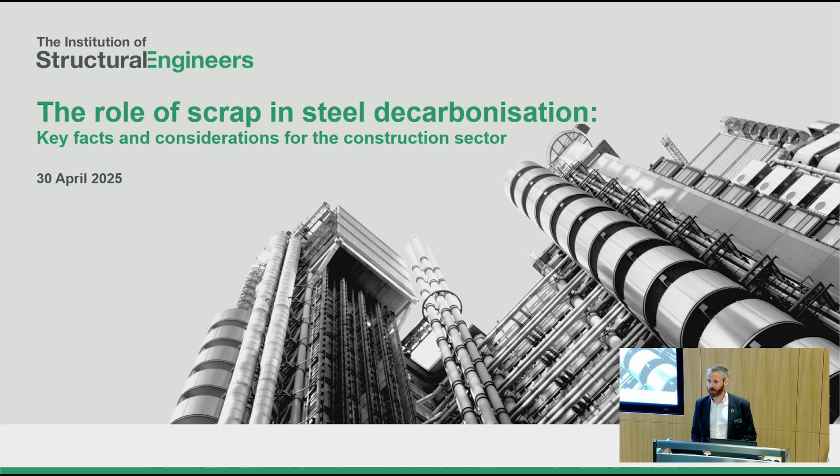So we're here to talk about scrap in steel decarbonisation, the role of it, what are the facts for the construction sector, and what do we need to consider when it comes to how we use scrap to decarbonise steel.

My name is Will Arnold. I'm Head of Climate Action here at the institution. I'm one of 3 speakers this morning, and so I'll just introduce the 3 of us in turn. I should start by saying that IStructE, for those of you who aren't aware of who we are, we're the world's largest membership organisation dedicated to the art and science of structural engineering. And we have about 30,000 members spread around the world, I think 138 countries. More. And we're a professional engineering institution, learned society and charity.

Following myself, Samin is going to speak on behalf of Climate Group, so thank you, Samin, for joining us this morning. Climate Group are an international non-profit. They're 20 years old. They have offices in London, Amsterdam, New Delhi, New York, and Beijing. And they have a number of different initiatives, all trying to drive rapid decarbonisation of some of the world's most important sectors. Sameen leads their SteelZero initiative, and she brings her background in energy efficiency and building decarbonisation to that job.

After Samin, we'll then hear from Michael, who's here on behalf of the British Constructional Steelwork Association, the BCSA. BCSA are the trade association for UK steelwork contractors. They're the core members, but they also have a broader membership than that, which includes corporates, industry members, steel producers, stockholders, software providers, and so on. And Michael, you've been around sustainability in steel for quite a long time, right? We've learned a lot from working with Michael on this project, so thank you for being here today to share that experience.

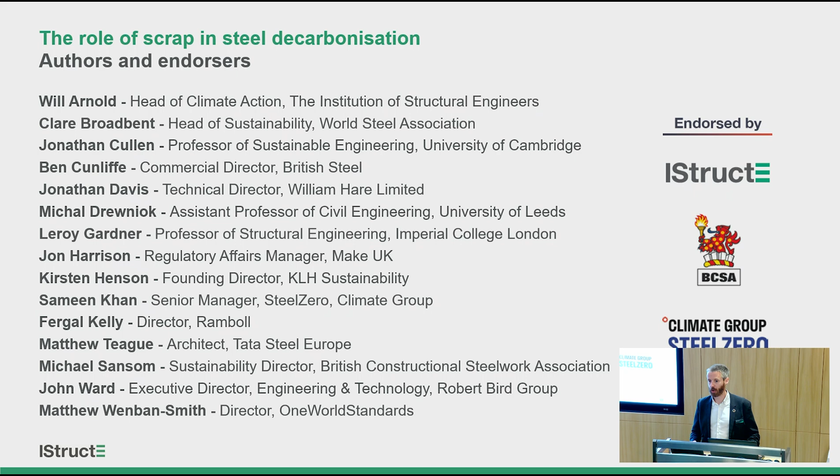We are not the only 3 who fed into this paper, and on the back page you'll see the full list of collaborating authors. You'll see that we represent contractors, consultants, academics, institutions and associations such as my own, and steelmakers, most importantly. There are others who have fed into this process as well, so we thank them for their contribution. And I want to say particular thanks to World Steel, particularly Clare Broadbent and her colleague Barris, who gave quite a lot of time over to us in the summer of last year to help us really dig deep into their numbers to understand what their view of the global steel flows and scrap flows really look like. So thank you, Clare. Thank you, Barris.

The brief that we set ourselves for this paper looks roughly like this. There were 3 things that we really wanted to try and dig into. Number 1, we wanted to pick up an objective overview of global ferrous scrap availability and steel demand both now and in the future. We then wanted to understand what that meant to the UK market, but we do so cognizant of that global picture, and I think that's really important that we keep both of those levels of the system in mind throughout these discussions. And from that, we then wanted to bring out recommendations that we could put both to policymakers and those working in the steel industry, working in structural engineering, that will help them use ferrous scrap in the best way possible to help us reduce global greenhouse gas emissions.

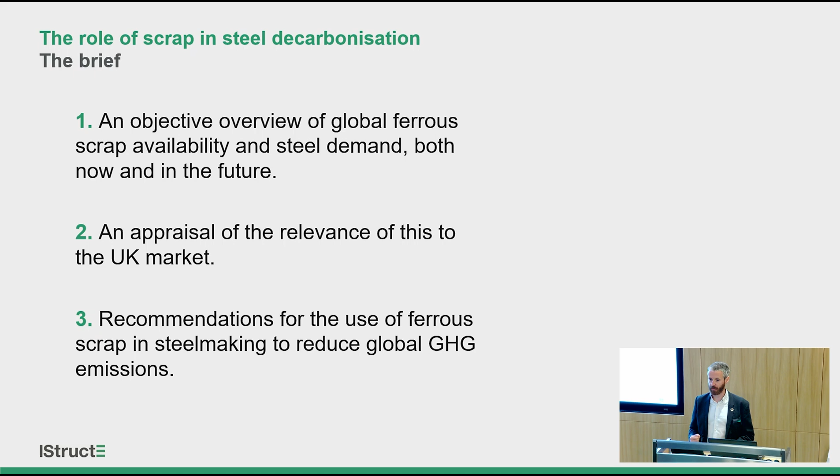And that word global is really important with respect to this paper. And it features both in the inputs and outputs, if you like. So when looking at the numbers for this paper, we were considering all sources of scrap steel. So that's not just the construction industry, who use about 1 billion tonnes of steel per year, but also the wider steel industry, which adds another 1 billion tonnes on top of it to give us the roughly 2 billion that humanity consumes every year. We were looking at global data for this global view to help us understand global greenhouse gas emissions. And so while the authors primarily come from a construction background, we do appreciate and acknowledge that the learning points in this paper are applicable to all aspects of steel use across all different industries.

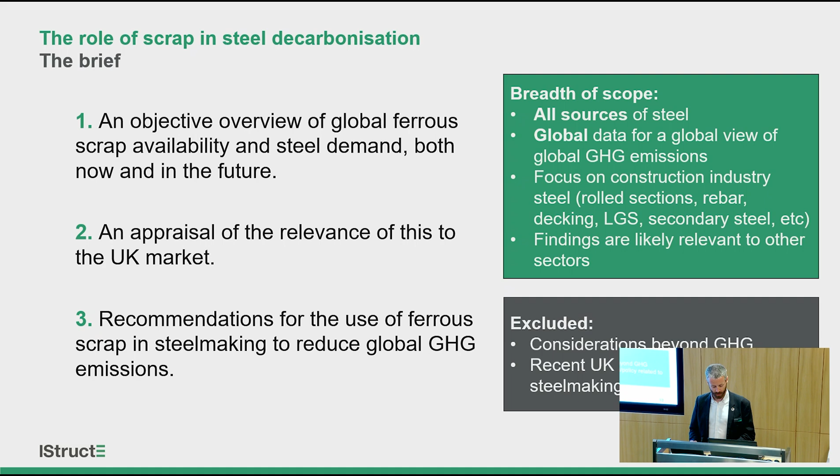With that, I'm going to hand over to Samin, who's going to talk us through steelmaking and scrap's role in that process. Thank you.

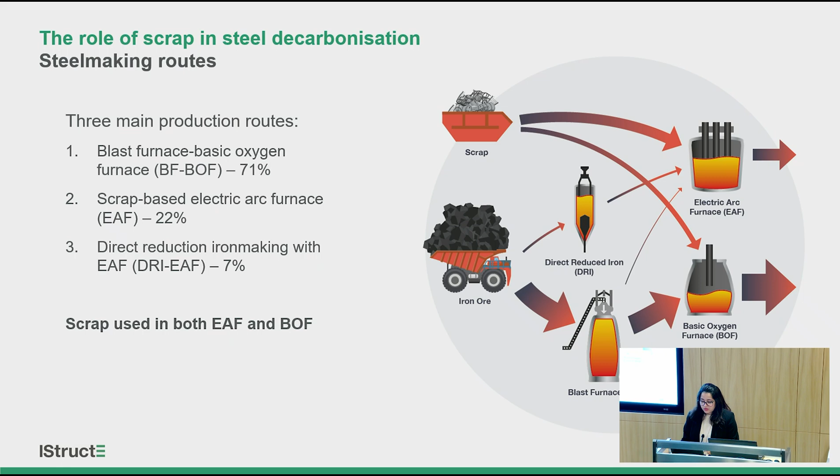It's a common misconception outside of the steel industry that scrap only gets fed into electric arc furnaces, resulting in secondary steel production, and only iron ore is used in blast furnaces and basic oxygen furnaces. But we do actually have scrap that is combined with iron in basic oxygen furnaces, and similarly, virgin iron that is combined with scrap in electric arc furnaces. So scrap is essentially used in all steel making. It's extremely valuable, and it's also well utilized.

So what we want to look at, of course, is the global availability of scrap. And we know that global scrap availability is currently only sufficient to meet about a third of global steel demand, approximately 35%. And this is purely because scrap is a factor of historic steel production, of lifetime of steel assets, and the rate of recovery of end-of-life steel products.

So what we wanted to look at was how much scrap is actually available globally and how much is recovered and recycled. We've come to this understanding through a lot of review of past publications. We've referenced World Steel's 2012 paper, but also tried to look for more recent publications that would either substantiate or contradict the findings at a global level.

But in all, what we've understood is that 80 to 85% of scrap that's generated globally is actually recovered. And of what's recovered, most of it is recycled, because with the inherent nature of ferrous scrap being magnetic, it's easy to recycle what you recover.

But of course, we do understand that there are piles of scrap around somewhere in the world which are uneconomical to recover, because we'll have steel buried deep underground in foundations, in sunken ships, or contaminated through use in applications such as the nuclear industry, which is more challenging to recover and reuse. So it's never going to be 100%, but 80 to 85% gives us a good sense of how valuable scrap is and how much is already being recovered, recycled and used within the steel industry.

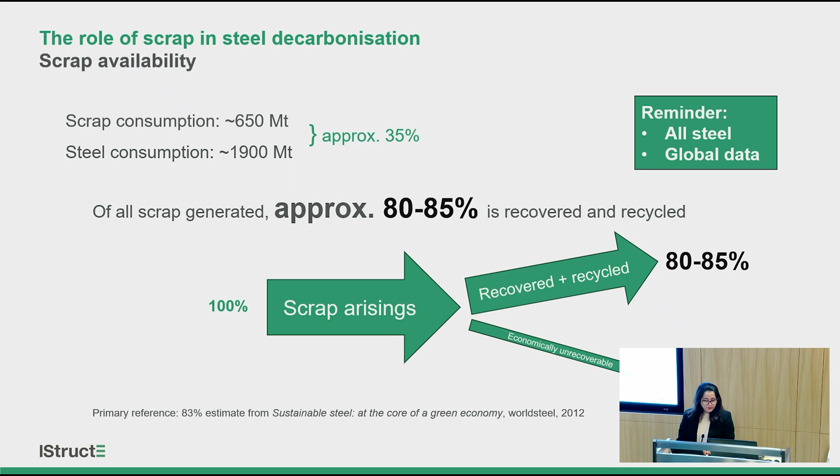So when we look at the future projections of scrap, there are gains to be had, because as a society we are becoming more efficient with the way we do business, the way we recover things, the way we use the resources available to us. So there will be efficiencies gained through improvements in scrap recovery and recycling. And based on historical trends, we could make a judgment on how much steel will come to end of life and be available for recovery.

So through these projections, we could say that by 2050, which is one of our climate target dates, the amount of scrap available could increase from current levels of 35% up to 50%. But we know that it's not going to be much more than this, at least by 2050, because global steel demand will also increase. So the ratio could change. There will be an increase in scrap percentage in steel making, but it's going to remain at that 50-50 level by 2050.

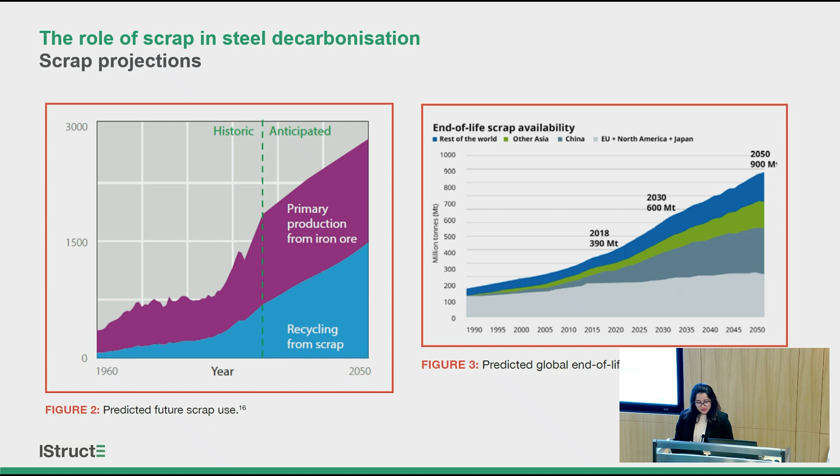So what we're trying to say is that in this paper, which is an extremely useful, updated literature review of scrap availability, the recovery rates, and the role of scrap in decarbonization, there are, of course, some nuances and uncertainties that we need to be aware of.

And one of the things that's always very challenging is how do we actually account for how much scrap is available? How do we track the material flows of scrap and steel use? That's always going to be a challenge because we're looking at global data. There's going to be variations by sector and regions where scrap is generated, recovered, recycled.

Some countries might not do it in as much of a sophisticated way that they can publish and share this data. And we also know in some countries there's a large informal sector of scrap recycling, again, where it might be difficult to really trace and track the amount of scrap available. So, of course, all of this has been considered in the review of the paper.

And what we also understand is that while scrap is highly valuable and highly recycled, we have, of course, two main types of scrap that we talk about: the pre-consumer scrap, which is scrap generated during the manufacturing of the steel products, and the post-consumer scrap, which is after end of life of the steel application. And we can say roughly there's about 50-50% of scrap generated in pre-consumer and post-consumer.

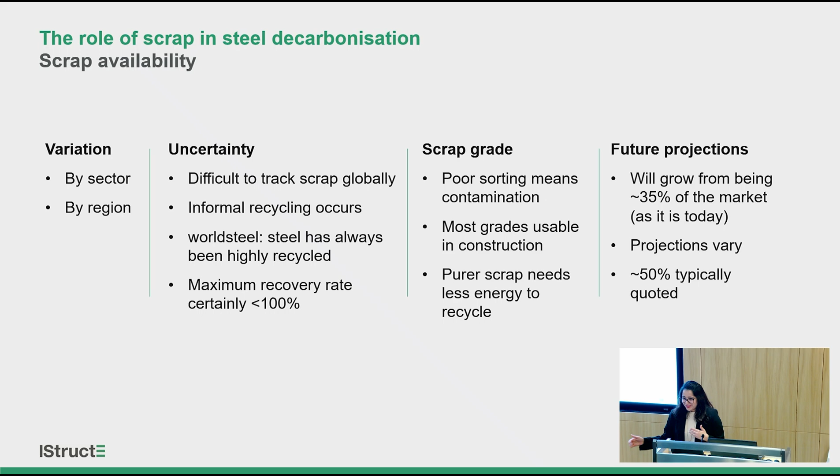And then, of course, how scrap is recycled and how the quality is maintained in that recycling dictates how it's used within the further steel making process, its reproduction for its new life and new applications. And that, of course, also then affects future recyclability and use of scrap. So to conclude this research on scrap availability, its role in steel making, before we move on to the low carbon steel making and recommendations section.

The first consideration is that we have learned that scrap is extremely valuable, it's constrained, as well as a highly utilized resource. And we've also concluded that the rates of scrap recovery are not going to significantly increase. It will increase a little bit, but not significantly. So we can't substantially just increase scrap-based steel making to solve the problem of decarbonization in steel making.

We have to look at all sources of steel production, all methods of steel production. That's the primary steel making that uses virgin iron ore, as well as secondary steel making with scrap use. And that is why throughout this paper we're calling it the dual decarbonization approach. And that is what we're going to be referring to and talking about a lot more when Michael also takes

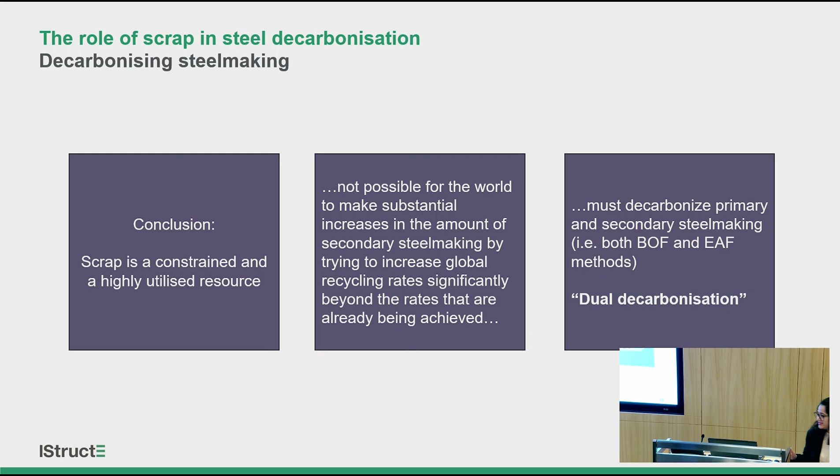And I think the complexity of the subject and the work done in this report kind of belies the concise version you take home with you today. Anyway, my bit is all about low carbon steelmaking and what we recommend, and I'll come on to that.

I just want to start with, and we really don't have time to get into all this. This is a whole kind of 3-day conference, isn't it? But there are lots of low-carbon steelmaking technologies under development, and they cover existing blast furnace or integrated production, so carbon capture, use and storage technologies, some skepticism about when they will be commercially viable, but government is pushing this. In terms of scrap, EAF production route, we're looking at lower carbon electricity and incorporating low carbon DRI into that process route.

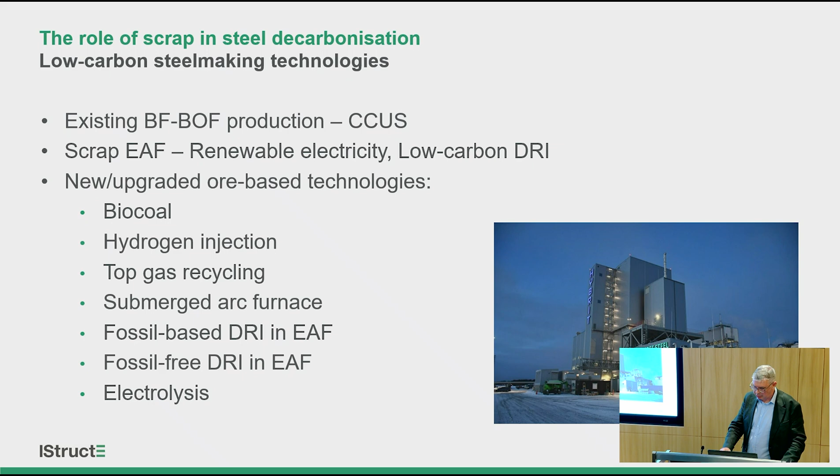It's going to take time. This is a massive industry, and it's going to take a lot of money. I've seen various estimates of 1.4 to 4.4 trillion to decarbonise the global steel industry. So it's certainly a tall order. So that's all I'm really going to say about the technologies. Instead, I'm going to focus more on specifying and incentivising low carbon steel, particularly in the context of this paper and scrap.

I think when we talk about low carbon steel, it's worth just pausing to think what exactly we mean here. What it is and how do you specify it. It's not easy. Low carbon is a relative term. What do we mean? Low relative to what? And there are no agreed definitions. There are various standards and approaches, but nothing universally or globally agreed yet.

Certainly current assessment approaches would mainly be the CEN ones, also the ISO ones. So the assessment methodology we use in construction, the upfront carbon emissions, so A1 to A3 in common parlance, clearly the EAF emissions are much lower than the blast furnace route production. Won't get into this either, but this assumes all scrap is recycled carbon-free. There's a whole debate around Module D and other things, but we won't get into that. But clearly on the upfront carbon emission side of things, there's a significant benefit for EAF-produced steel.

So what's the best approach to specify that within a global context? And I just re-emphasise, as Will's already said, we're looking at a global context here, not a project context, not a national context, but a global one. Steel is a commodity product. It is traded widely globally, and clearly climate change is a global issue. So that's the context for this publication.

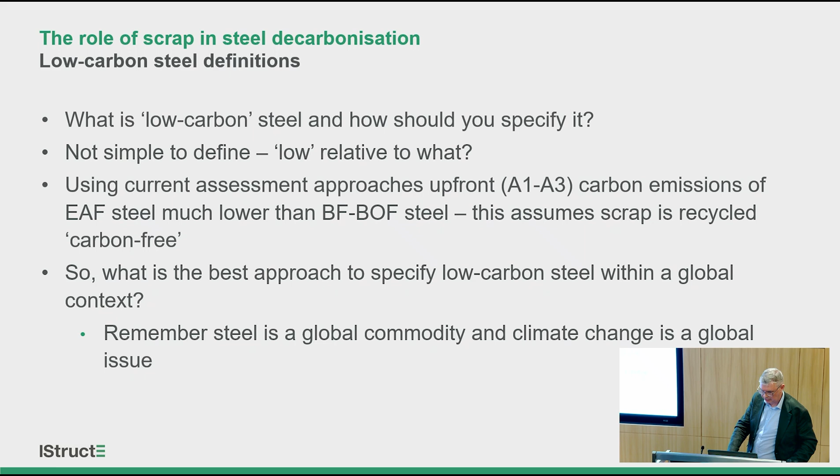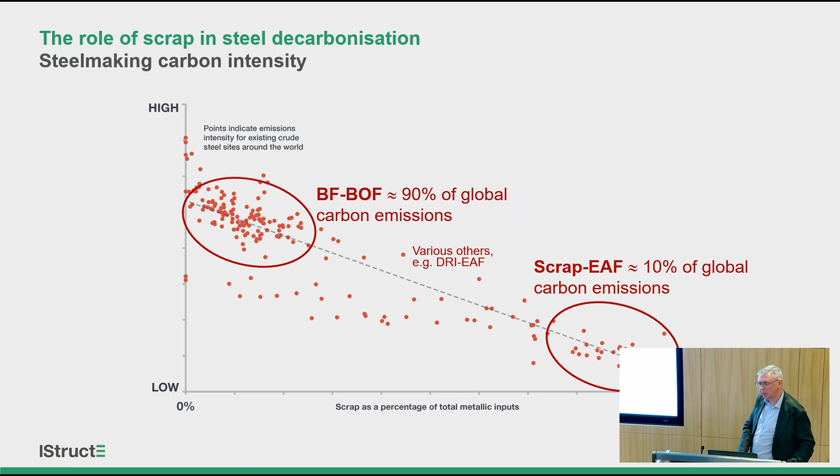But the important point to note on here is that the cluster to the left represents something of the order of 90% of global carbon emissions from steelmaking, whereas this cluster to the right is probably only about 10%. So the obvious conclusion one might deduce is we need to shift to the right, move to higher percentage scrap and delight your client with a low embodied carbon project. But of course, as we've heard, scrap is a constrained resource, and quite simply, we can't do that. There isn't enough scrap. Even if we increase 80, 85% up to maybe 90%, all we're doing is shifting all those dots a little bit to the right. It's not going to solve the global challenge.

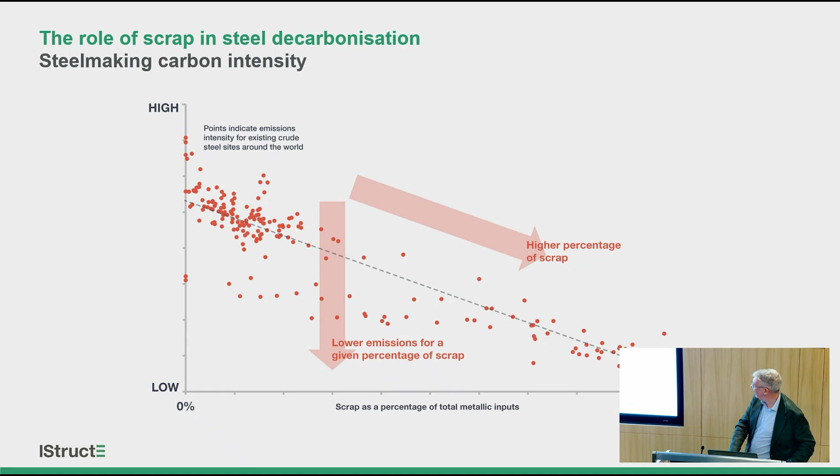So instead, and this is the approach we've adopted, instead of moving left to right, we're moving from top to bottom. As you can see, there's a reasonable variation if we look at a vertical line on there. So there is variation, and what we're encouraging is all those mills to decarbonise, to move downwards on this graph. I would accept that there are some issues with scope and measurement variation, but in essence, that's what we're proposing. So we're asking all steel mills, irrespective of technology, to decarbonise. That's the only way to solve this in the context of global steel demand and global scrap supply.

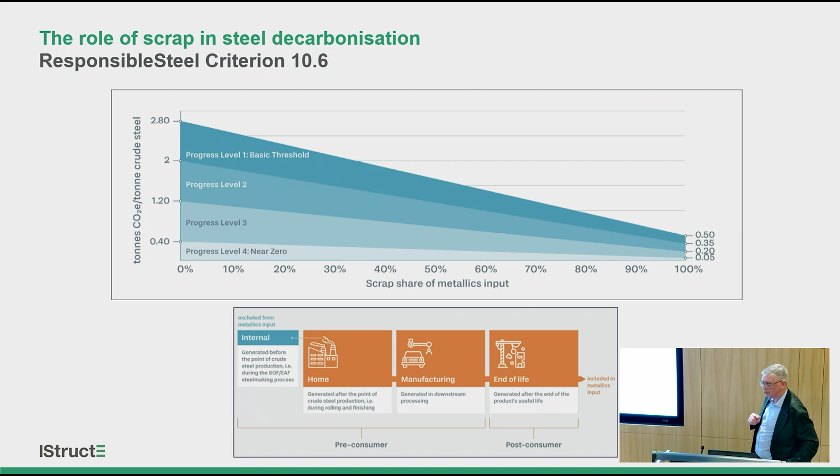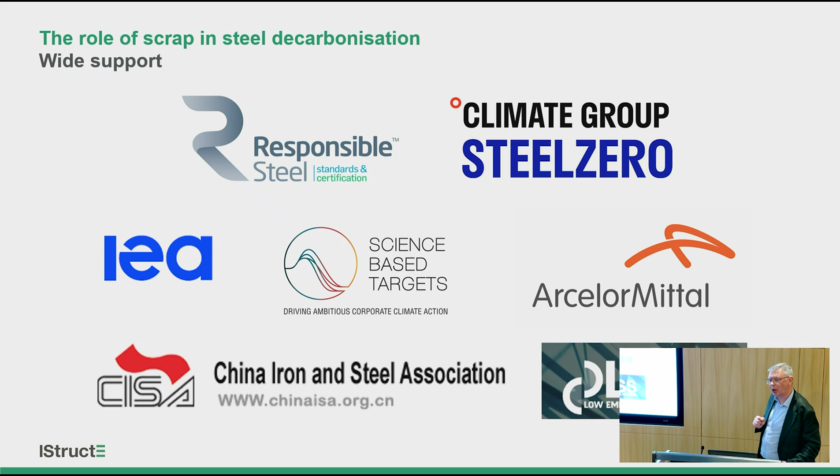And of course, this is the manifestation of that under ResponsibleSteel, criteria 10.6. It's also the approach adopted in SteelZero, and you can see the different progress levels there which are adopted both in ResponsibleSteel and in SteelZero. But this approach isn't ours really, and it isn't just SteelZero. There are many other organisations supporting this same approach. The IEA probably started it, but new standards, we've seen the German standard LESS and the new Chinese standard, are all based on the same sliding scale or dual decarbonisation approach which we're advocating.

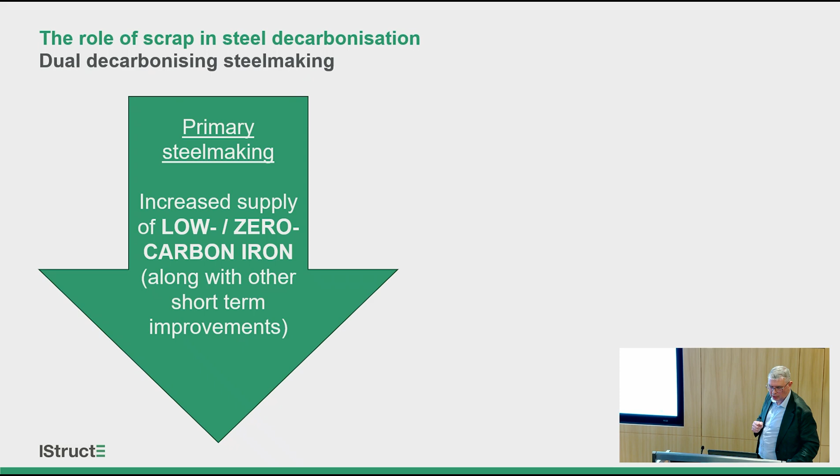So really, just to conclude then, without getting again into the detail of the technologies, what we're looking at is decarbonising both primary steelmaking, so through increased low or zero carbon iron, could be DRI, could be other technologies, and then in terms of the secondary steelmaking, we're talking about decarbonising the electricity used to power those furnaces, and we're talking about better segregation and sorting of scrap so we can maintain quality and maintain and hopefully improve slightly those recycling rates. And this is the dual decarbonisation approach that we're advocating in the report, and many others are advocating around the world.

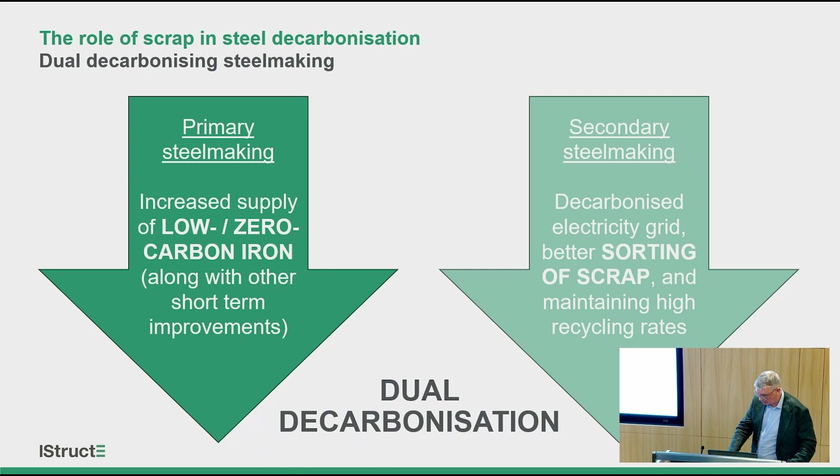So I'm sure loads of questions are coming, but I'm going to hand back to Will, who's going to wrap up with some of the key messages. Thank you very much.

So the paper contains 5 key messages, which are at the start of the paper, even though they're at the end of the slide deck, and contains a number of recommendations that we're proposing both for policymakers and those working with steel directly. I'm not going to read them all out verbatim, they're quite long, but just to pick up on the really key points within both the key messages and the recommendations.

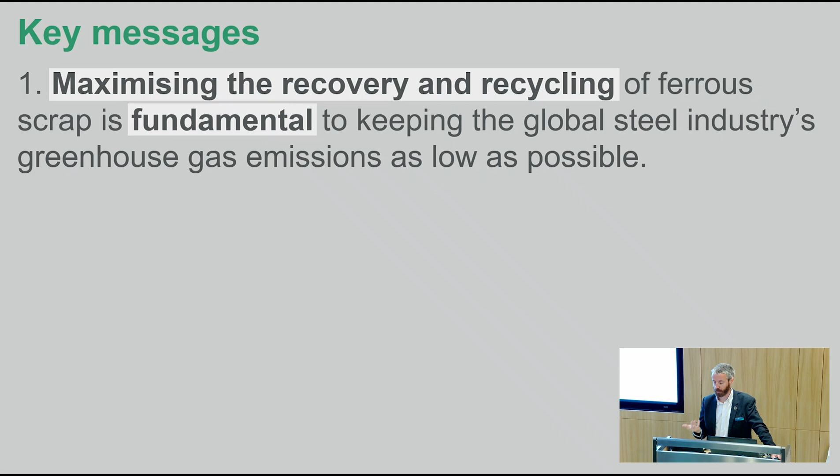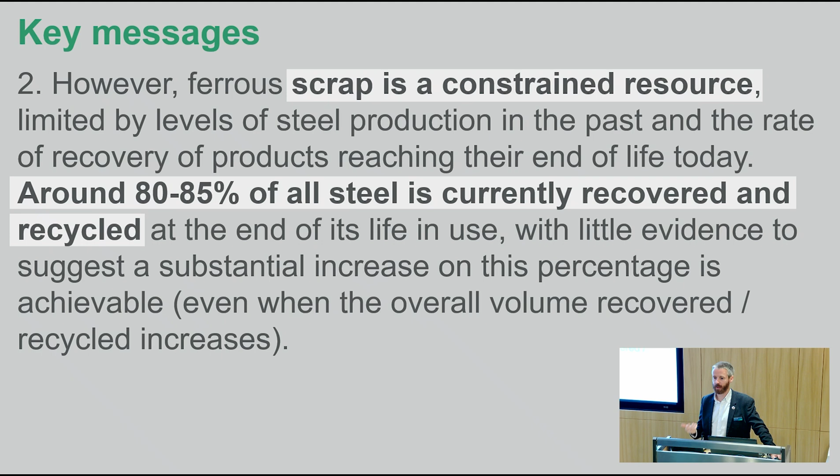Number one, we recognise that there is a need to absolutely maximise the recovery and recycling of scrap in this industry and in the steel industry in general. It's got to stay as high as it can, and if there is room to improve it, we would support that. However, we must recognise that scrap is a constrained resource. It's highly utilised. We're talking 80 to 85% utilisation, and we recognise that that number could never be 100%. There will always be some scrap that is economically unrecoverable. So that gives us a bit of play on that number, but there's a limit to it.

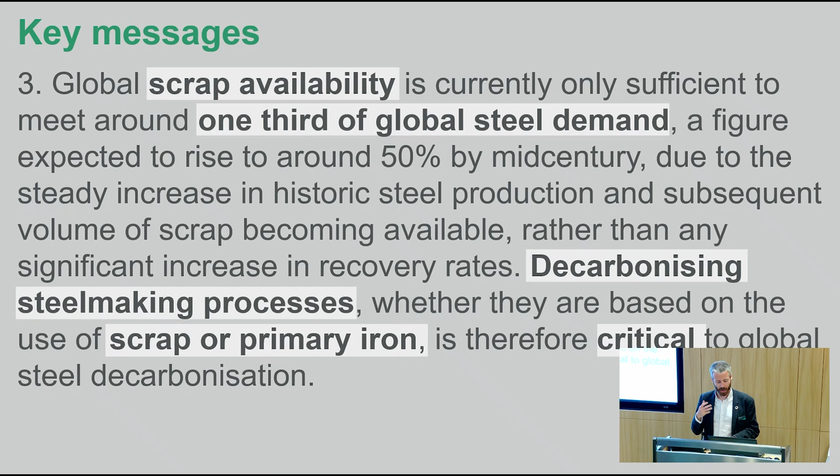We recognise that global scrap availability is enough to satisfy about 1/3 of our current steel demand around the world, and that percentage will rise with time, but only to, at most, around the 50% mark, as Samin said. That means that by mid-century, half of all steel will still be produced using iron. We can't get out of that. Therefore, we can't just rely on recycling. We have to do something about primary steelmaking as well. And that is why we're calling for this dual decarbonisation process, because decarbonising scrap-based steelmaking and iron-based steelmaking both need to happen in parallel.

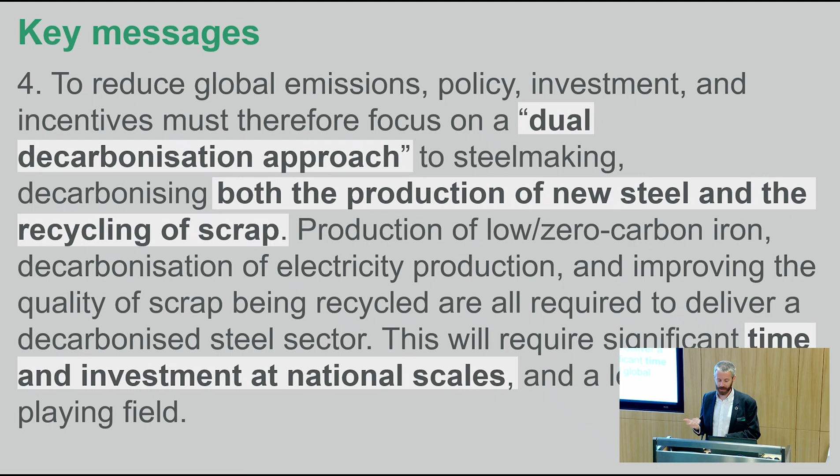That takes us to key message number 4. This means significant time and investment at a national scale. We can't get over that. The numbers that Michael said are very big numbers, but this is what's needed if the steel industry is to decarbonise.

And the 5th and final key message is that in terms of what the construction industry can do, and I'm aware that most people listening today probably work in construction rather than car making or fridge making, what we can do is to support steel recovery and reuse. We've got to do our part to help keep that scrap recycling percentage as high as we can. We should be using steel as efficiently as we can. Scrap is constrained. Steel is a valuable resource. We need to treat this as a valuable material, use it efficiently. We need to be designing for reuse.

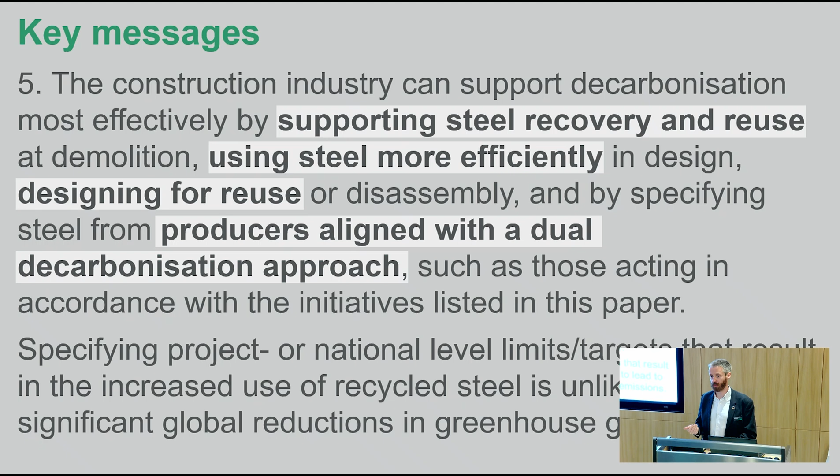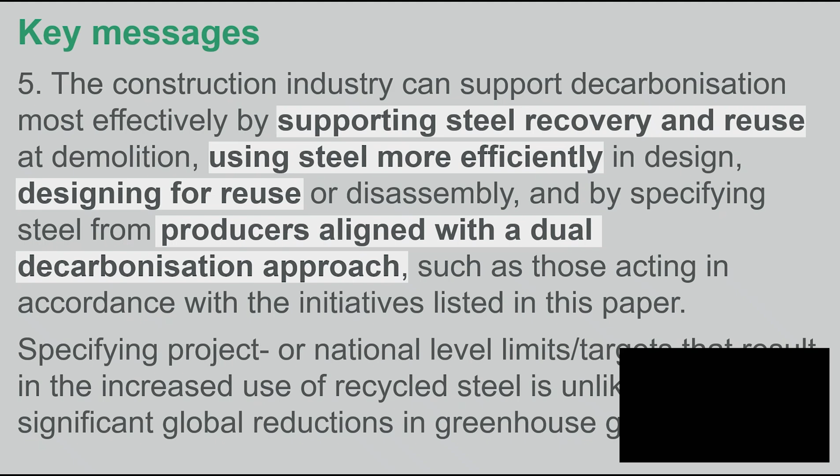And when it comes to specifying our steel, we need to be specifying it from suppliers who are aligned with this way of thinking, who are aligned with the dual decarbonisation approach. And Michael showed some of the initiatives that align with it on the screen before. And I would expect that there are other suppliers out there who would tell you that they're working to decarbonise primary or secondary steelmaking as well.

The recommendations at the back dig into a bit more depth. I won't read them all out, but I think there are three key things that are repeated within the recommendations page. Number one is about education. So this is about helping our clients to understand that there is this real tension between getting the lowest carbon project we can and decarbonising at a global scale. And it's not obvious how you do those both at once, but we need to work out a way to do it.

Number two, obviously what comes up again and again through these recommendations and through the paper is this need for dual decarbonisation. So whether you're a policy maker and therefore writing policies that align with that, or you're a steel specifier and therefore specifying in a way that aligns with it, or you're a steel producer in the supply chain working out how do we support that dual decarbonisation approach, how do we get our bit of the steel industry to decarbonise, whether you are primary or secondary.

And then the third thing that repeats is this need to treat steel as a valuable resource, use it efficiently, design it for efficient use.